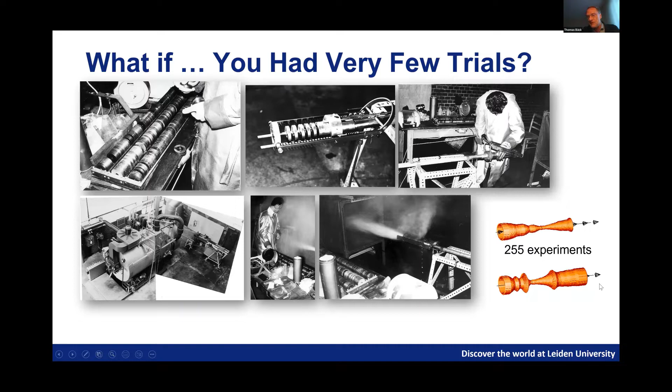And then after 255 experiments, the nozzle design that you see in the bottom right corner was evolved. And interestingly, unimaginable by human experts, it was actually 32% more efficient than the initial nozzle, which was a very simple design that had been proposed by the experts to start with. I said before, this is an experiment from the 70s, which was published in this publication.

And I think it's still an extremely interesting example showing that evolutionary strategies, evolutionary computation, can be extremely efficient. Many of you have been using maybe 1, lambda type algorithms, even in a genetic algorithm setting where only mutation is being used. You have very small population sizes, and you can be very efficient in finding a good solution with a small number of experiments.

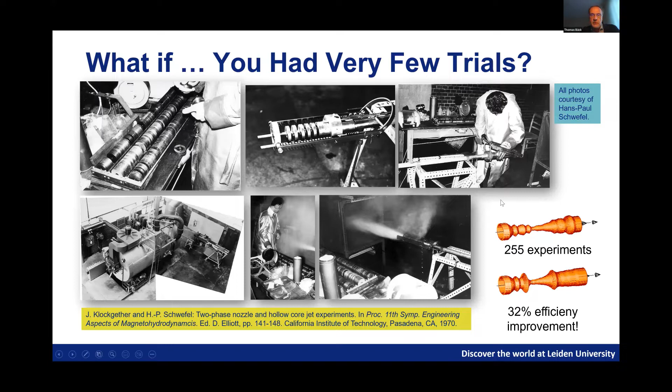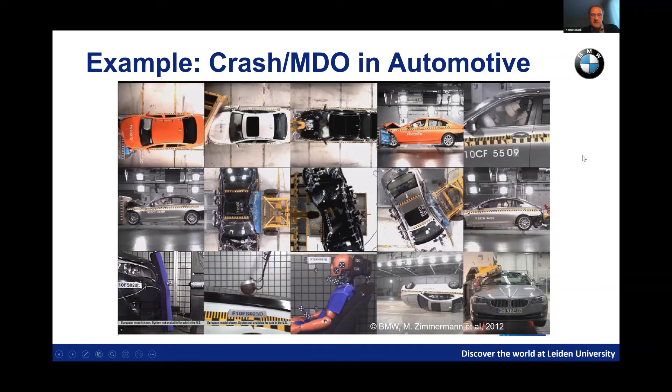In many industries, they would say, though, we really don't want to have iterations. We would like to get a solution immediately, meaning, can we not evaluate all of the designs in parallel and then get a solution after one iteration? Because that saves us time. And when they say time, they really mean elapsed time. Like we want to do this in 1 day rather than 1 week or 2 weeks.

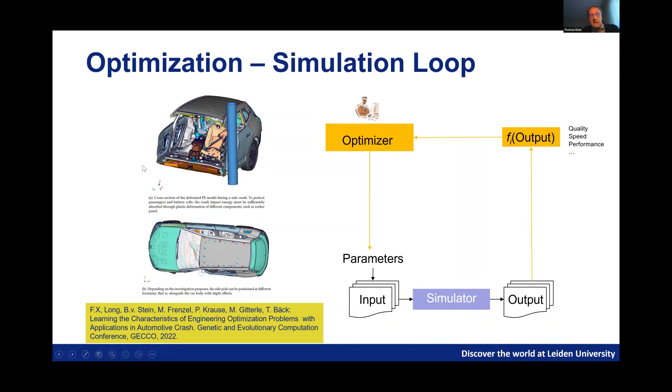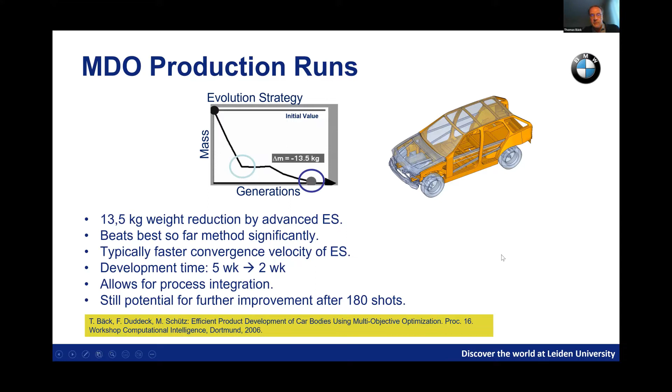Going further, you can, of course, immediately see, and I'm a big fan of this, that you can also use this for algorithm configuration in general. So if you replace the word simulator by the word algorithm, then you get a very general setting. You have inputs, you have outputs, you have parameters of the algorithm that you need to tune. And of course, we can do the same as before. We can have an optimizer or a meta algorithm that does the tuning. And then, of course, all of you know we are immediately in the domain of algorithm configuration, hyperparameter optimization.

With the typical formulation, we have a set of problem instances. We have the algorithm and the algorithm parameters. We compute some function that measures a statistical parameter, for example, a mean across these instances. And then we have the cost values that we get, and we can look for the set of algorithm parameters that is maximizing the performance.

And to me, it's completely intuitive, like it will be to many of you, that this meta-algorithm can be an evolutionary algorithm. And Grefenstette's paper from 1986 was the first example, which used a genetic algorithm to tune a genetic algorithm. So it's a no-brainer from our perspective. I think we all agree on this. So we did this developing a mixed integer evolution strategy. This is an algorithm that we developed about 15 years ago. It's a very simple idea.

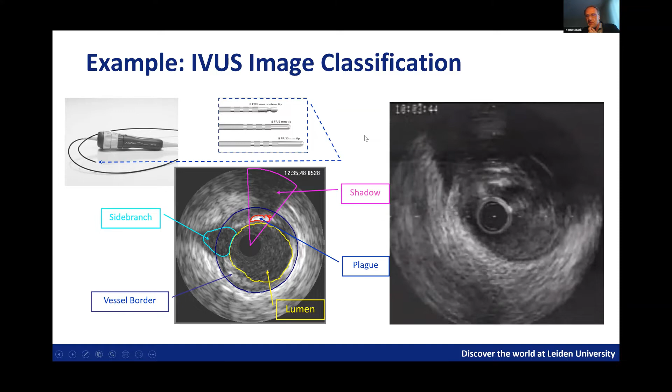But the bottom line is it's very difficult to reliably identify the plaque, and therefore you would like to have image analysis algorithms that support you in doing that. Now these algorithms, and you see these publications are from the time frame 2006 to 2013, have many parameters. And here you see that these parameters actually fit the description I just gave you before. They are integer, ordinal, Boolean, continuous, and so on.

So you can use this mixed integer evolution strategy to optimize these 16 parameters, and the results are such that you can easily get a performance improvement in the classification of 40% for the resulting data sets that have been pre-classified, of course. So we have training data in this case. And it's a very nice and very easy way to use this method for algorithm configuration. Bottom line, evolutionary computation is also a very good alternative for algorithm configuration in general.

Let's look a bit further into another application where we did some additional solution mining, looking at the set of solutions from the perspective of trying to understand the structure of local optima. This is an application which for many years I found fascinating. We actually started in the 90s with this. It's optical systems.

And those of you who have known a little bit about this, it's actually an extremely interesting world because the problems can be formulated as variable dimensional mixed integer categorical optimization problems, because very often in optical system design, you do not even know how many components to take. So it's already a variable dimensional problem.

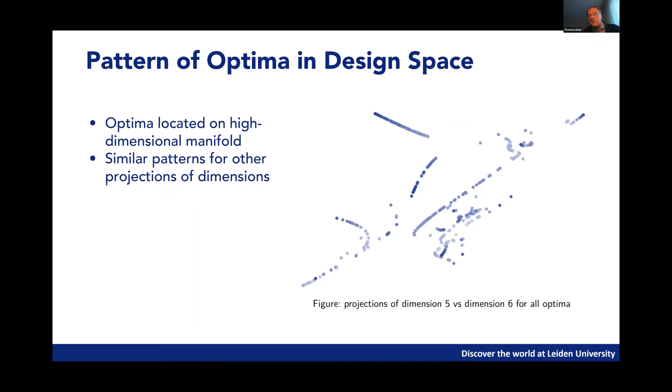So the next idea, obviously, is to train a classifier, and a very simple starting point was a support vector machine-based classifier that can actually differentiate with 85% accuracy, predicting feasibility. That's still not good enough, so further work is on the way to actually make this better.

But of course, it would be very nice if we could predict already from the input vector whether we have an infeasible solution, because then we don't need to run the evaluation, which is not that expensive. But if it's 1 minute, and it is about 1 minute in this case, this is already something where you would like to save that computational effort if you can predict infeasibility.

Moving to multi-criteria optimization, we are very interested now in something that people like to call explainable AI. Yeah, that's a big term. I think it's completely sufficient to say we analyze the solutions again, and we're trying to understand the structure of the solutions. But explainable AI is a more fancy term, of course.

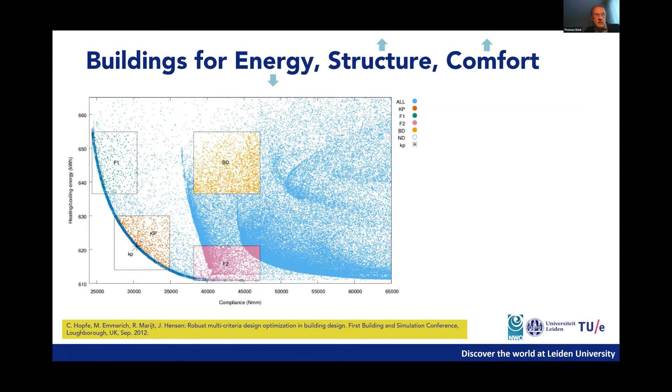So we see lots of dominated solutions. All of these cloudy areas over here are dominated solutions, which are not on the Pareto front. The Pareto front is the solutions over here, which cannot be improved in one objective without getting worse in the other one.

And now you can easily take some subset of this and apply a machine learning algorithm, for example, just a simple decision tree algorithm that generates a decision tree that allows you to characterize some of those clouds, like the 4 subsets that we have selected here. So you can learn something about the structure of solutions which are on one end of the Pareto front, the other end of the Pareto front, in the middle, which we call the knee point, or completely dominated and therefore worse than all of the solutions on the Pareto front.

So these buildings actually, not all of them, but some of them exist, to be honest, and that's a very interesting practical application indeed. And you see that on the extreme ranges for structural performance, we get buildings like that. If we want to optimize for thermal performance, you get high buildings. If they are of low quality, you get arbitrary mixtures of these two forms.

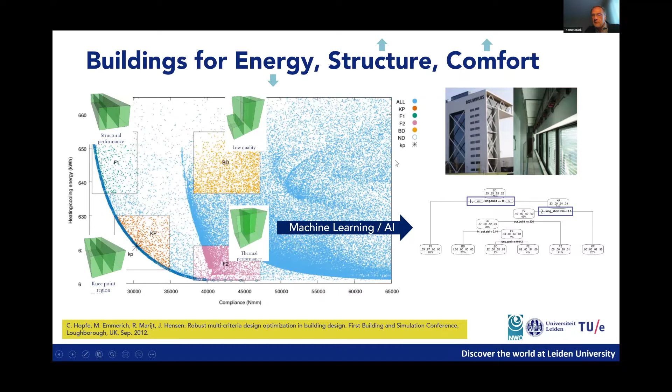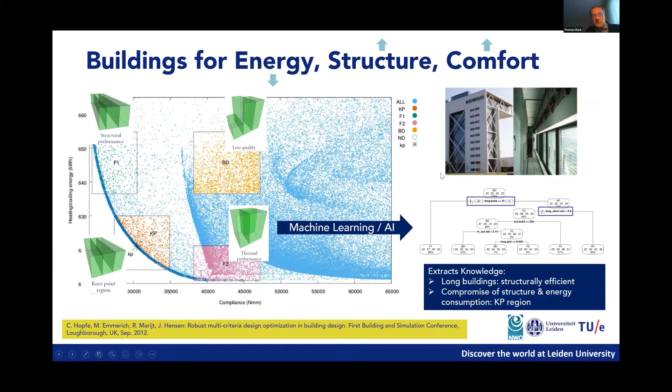And if you're in the knee point region, then you get some kind of crossover between thermal performance and structural performance. Bottom line, extracting knowledge can then give you results such as long buildings are structurally efficient, which makes sense. And a compromise of structure and energy consumption can be found at the knee point region.

We did the same for ships, which is also very interesting. You can imagine that for ships, all kinds of criteria are being evaluated, like the performance in water, the resistance in water, the ship weight plays a role, but also other criteria like tank size and stuff like that. This is just one of those optimization runs.

Again, the green solutions that you see are on the Pareto front. I should say non-dominated solutions. The red ones are infeasible and the blue ones are dominated solutions. So you see a Pareto front emerging between resistance and tonnage.

You see on the right-hand side here how these ship forms evolve. Essentially, geometry parameters, steel thicknesses, and positioning parameters are optimized. And at the end of the day, again, a compromise between resistance and tonnage of the ship is emerging. And again, if you want to squeeze out tonnage, then the resistance goes up. If you want to squeeze out resistance, then the tonnage goes up.

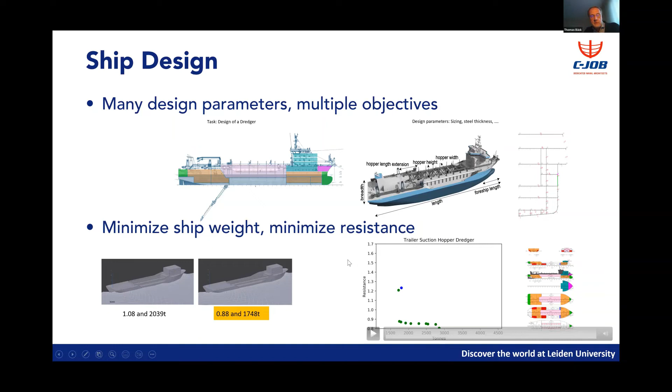And at the end of the day, you get compromises like this, where resistance was reduced from the original design to 0.88, and the tonnage from 2,039 tons to 1,748, which is a significant improvement in both objectives. Actually, the maritime engineers are constantly very surprised by the solutions that they get.

The new algorithm developed here, published between 2017 and 2018, and which we are constantly working on, is actually based on Kriging models for the objective function values and radial basis function models for the constraints. So it's also learning the constraints using machine learning techniques.

And then we are only using an evolutionary optimizer here for the acquisition criterion, which is evaluated on these meta models. So we are now moving the evolutionary algorithm inside the efficient global optimization algorithm for optimizing the acquisition function and finding multiple solutions on the acquisition function, which is a trick. Rather than the outer loop, it's now the inner loop in an efficient global optimization algorithm.

And again, multi-objective optimization: you want to minimize the ship weight, minimize fuel consumption, and maximize uptime. So you get nice pictures like this at the end of the day. And indeed, analyzing this gives surprising insights to the maritime engineers. So you see two objectives characterized here on the X and Y axis, and the third objective, the light ship weight, indicated by the color of the points on the Pareto front.

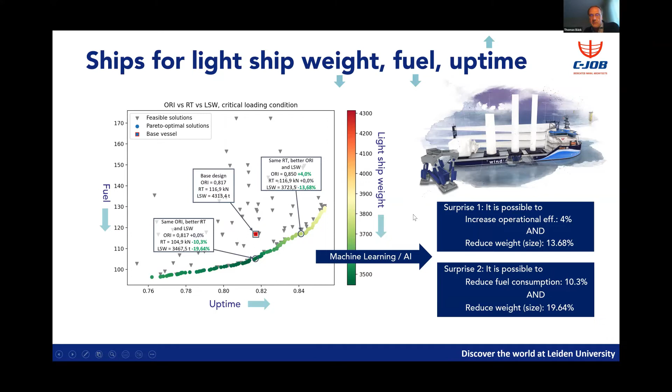And then indeed, you can conclude real surprises for the maritime engineers. So from the initial design, it's possible to increase operational efficiency by 4% and reduce the weight by 13.6%. Or you can go the other way. It's possible to reduce fuel consumption by 10% and reduce the weight by 20%. And again, this is a real-world ship design. These ships are actually really being designed by C-Job maritime engineers, and some of them are even being built because these are real-world applications.

Getting back to the car crash, I'm sometimes surprised when I see real-world applications and when I see, from an academic perspective, what kind of problems really exist in real product development. So let me show you an example that's actually relying very much on an automated machine learning approach for simulation data. It's a complex slide, but many of you do these things every day.

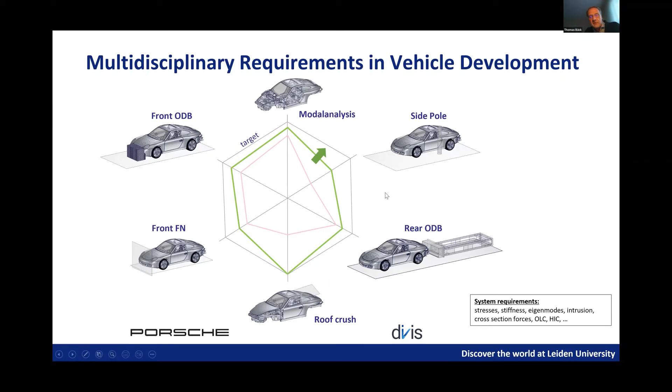Now, for each of those, you need a different simulator, but also many of those are actually being discussed and optimized in different departments in an automotive company. So you have different groups internally that take care of different disciplines. That's a very interesting detail, which we will get back to. So these multidisciplinary requirements actually require interaction, communication, and negotiation between these different groups. Okay?

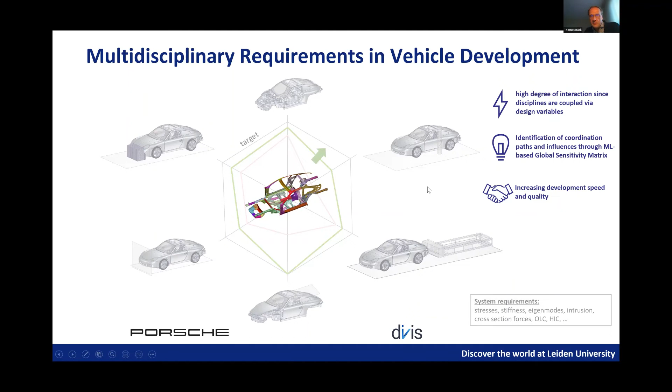So in the paper that was cited in the beginning of this section, we present a procedure for what we call the global sensitivity matrix, where the data is being collected from design of experiments. Then you run this automated machine learning procedure. So for each one of the objectives, you get a meta model, a response surface model. Then you can actually analyze the sensitivity of the parameters.

And again, this sensitivity analysis allows you to identify impactful parameters. You can also make real-time predictions, obviously, because now you have the meta models and you can actually ask them what is going to change if I modify one of those parameters in a certain direction. Then you can compute what we call the global sensitivity matrix.

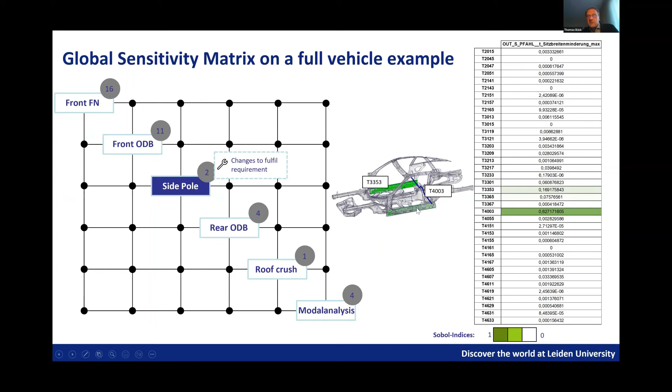Okay. However, now we look at different disciplines in parallel. We know the impact of a single parameter on a single discipline, whether it's high or low. And here you can now nicely see that certain parameters are actually having a cross-discipline impact. So this parameter is actually coupling various different disciplines, and therefore clear indication, hey, people from different departments need to talk about this. This sounds like a triviality, but it is actually extremely important to analyze this and to figure out these connections, because it means that this parameter cannot be optimized by one department in isolation, obviously.

Likewise, you can say, okay, there are certain parameters that seem to have no impact at all, so we can do a dimensionality reduction for the optimization. You have other disciplines that might only be affected by very few parameters. So in this particular case, only 3 parameters seem to really have the main dominating impact. By the way, if there's no entry, it doesn't mean that the impact is 0, but that it's below a certain threshold, which is pretty small.

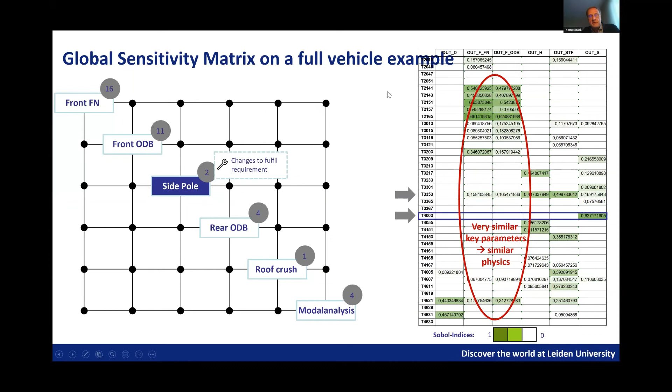And then obviously, these 2 disciplines have very similar key parameters, and therefore they might have a similar physics and can actually be considered in a combined way. Very interesting, very insightful, although no direct optimization at this point in time involved. How do we do the optimization here? We do the optimization in a one-shot way, which means these machine learning models are now being used by optimizers to predict the location of an optimum and the confidence about the prediction. And then you evaluate the resulting solutions with the simulator again.

I need to speed up a little bit. I wanted to give you a few production process examples too, where we actually start with machine learning and then optimization kicks in at the end. And one of the examples is steel and automotive, and I will also talk briefly about a chemical process in the remaining 6 minutes, so I think I will be able to make that.

A long time ago already, we started with a research project in cooperation with BMW, Leiden University, Tata Steel, that actually looks into the role of steel in the automotive industry. On the one hand side, steel production and steel quality optimization. On the other hand, the forming process in the automotive industry.

One of the big issues that the automotive industry has is that they would like to understand whether a coil, a steel coil that they get delivered, could potentially be causing issues in production. It's within specifications, so they accept it because it fulfills the required specification. But it might still be an outlier in production. So what you need is some kind of anomaly detection that looks at the data about the coil and then automatically flags it as an anomaly.

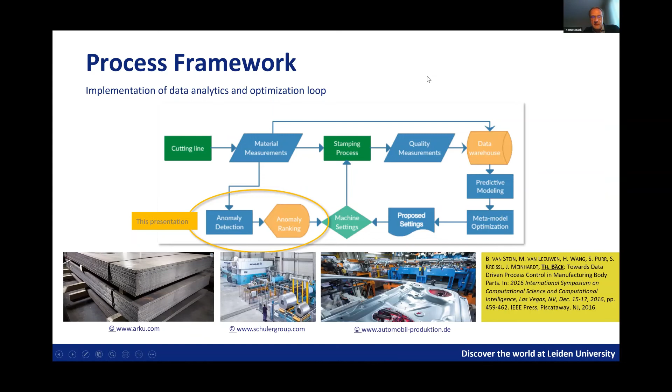Now, since quality is so difficult to measure, we also looked into unsupervised learning for recommending process parameters. This paper won an Industrial Impact Paper Award at the conference where we published it, because it really is being used in practice. In the current situation, it's very difficult to find good process parameters, and people are extremely reluctant to experiment on the press, as you can imagine. So they put a lot of expert knowledge into the process, and they say, this is fine, we are happy with it.

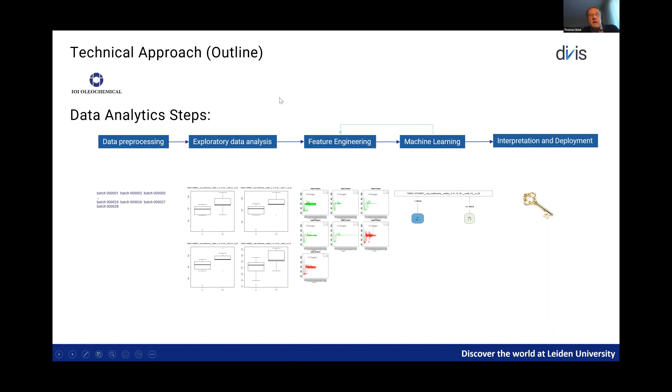but only together with the client, because they will tell you, oh, we forgot to tell you this and this and this. And then at the end of the day, you can actually try something on the real plant, which really made me nervous, I must admit, because after all, you really need to trust what you found in the data. And then at the end of the day, all batches can be sold, 100% perfect product. And the problem was found and fixed.

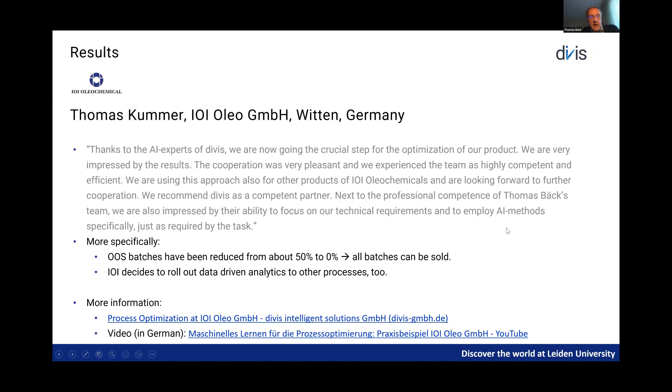And of course, this is the kind of applications we are aiming for. This is really what we want to see in reality. And still in real world production processes, these success stories are rare. And in conclusion, that is also part of what I want to say. So my personal conclusions are that while new algorithm development is continuously ongoing, we go from data models to model-based optimization. Every application is different. It requires expertise. It requires domain expert cooperation.

But it's still very exciting for me to go all the way from applications, from algorithms to deployment. And AI in engineering and in production is still relatively new. And every single person I talk to is completely ROI focused, and that is a good thing because it's challenging us, because they indeed say, how much money can I save? Can you guarantee this?